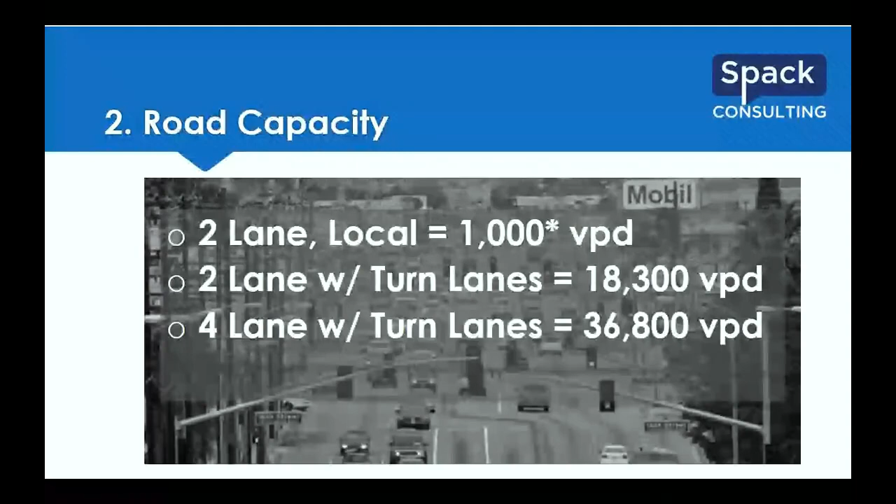Moving on to a 4-lane road with turn lanes, we're up to 36,000, roughly double the 2-lane. If you wanted to round those numbers, go to 18,000 and 36,000 - that's an easy way to remember it. You don't have to worry about it for planning purposes; this is just that ability to handle the vehicles.

For the 6-lane, you're up to 55,000 - again, roughly 18 per 2 lanes. Just think of each 2 lanes as 18,000 vehicles, so 18,000, 36, 54 gets you in the ballpark. There's the split, the commuter split, directional, and all kinds of different factors that go into those numbers, so that would be a reasonable estimate.

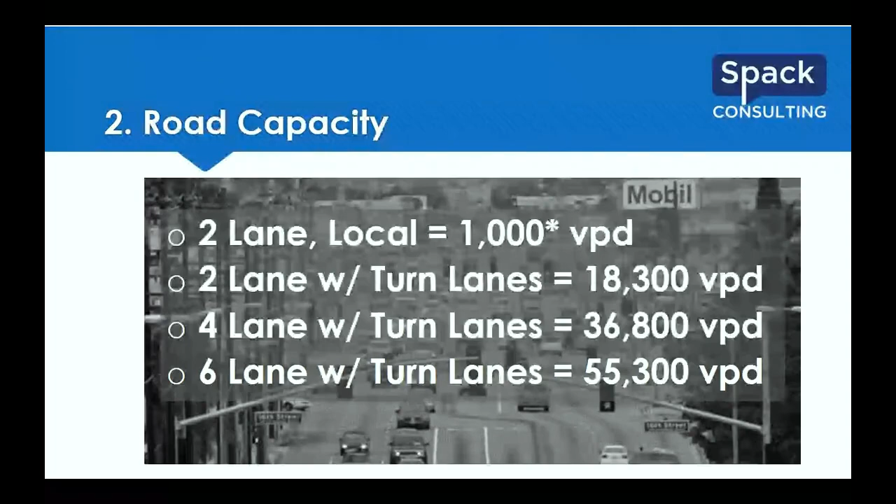More to the topic right now, are there hard medians with the turn lanes? I would say when you get to the 4 and 6 lane, there could be. With the 2 lane, it could be a 3-lane road as opposed to those definitions, so the median is one of those specific factors. You can dig into the Highway Capacity Manual and get more refined, but we're not asking you to put these numbers into your report and make any decisions on them - these are just kind of ballpark, in the range of.

Next, level of service grades. What we like to really identify is the D to E boundary. E is typically when you're at capacity, and most agencies will say that's unacceptable - they want to stay at level of service D or better. So that is the boundary that we look at.

There are 3 different types of traffic control when looking at intersections: stop signs, roundabouts, and traffic signals. The stop sign control and roundabouts use the same metric - in this case, 35 seconds of average delay for the intersection. When you go to a traffic signal, people have a greater capacity for waiting, since they know they're going to get their green, so they can sit longer - that's why we have 55 seconds for the traffic signal. This information is from the Highway Capacity Manual, 6th edition.

It hasn't changed through many editions - it's always been the same for me. But if someone is trying to relay that level of service grade to delay, or trying to make that definition back and forth, it's important to know those are the values you're looking at.

Again, these are average delays, so that's a nuance to talk to people about. That means some people get to go through at a roundabout or signal with 0 to a couple seconds delay, but people on a busy cross street waiting to get in can wait 1.5 minutes - again, it's the average. We're not going to talk about side street delay, where the Highway Capacity Manual doesn't talk about overall level of service and only does the side street. There are variations, but the important thing for all of these is just basic numbers to keep in mind.

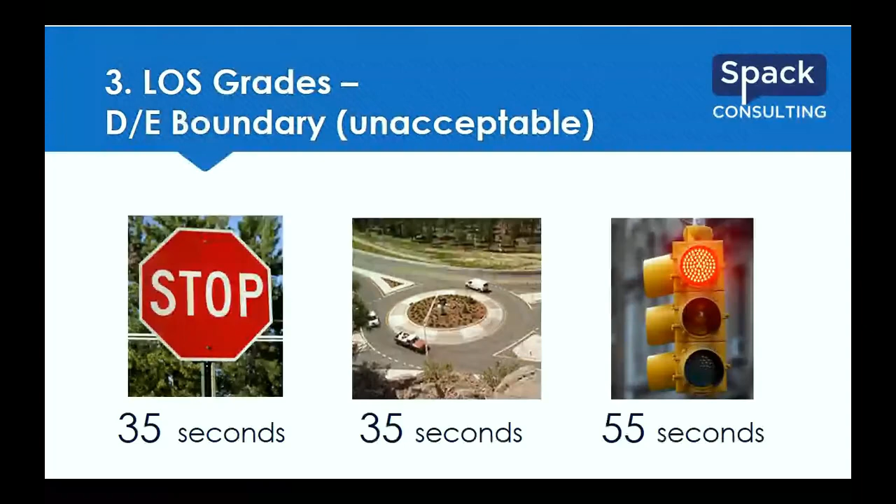All right, our next one is saturation flow rate. This is for a specific lane, basically. You have an entry lane, a single lane going into a development or anything, you can use this as the backdrop for that. So 1,900 vehicles per hour per lane.

In most studies, you're not going to have to reference this. It's not going to come up because you're looking at intersections or corridors, and it doesn't get down to that grade of detail. More importantly, where this would come up is if you're doing a QA/QC check, particularly for events, and you have an entry coming in, and you're either reviewing it or your computer is telling you that you can fit 3,000 vehicles on this single lane into this parking lot or something like that. That's where this becomes important to think back on and say, okay, we have our theoretical maximum of 1,900 per hour per lane. If we have one lane and this is telling me 3,000 vehicles per hour, how does that work? It's not possible. Just because the computer is giving us an answer doesn't mean it's right. This is one of those things to quality control check yourself, keep in the back of your mind.

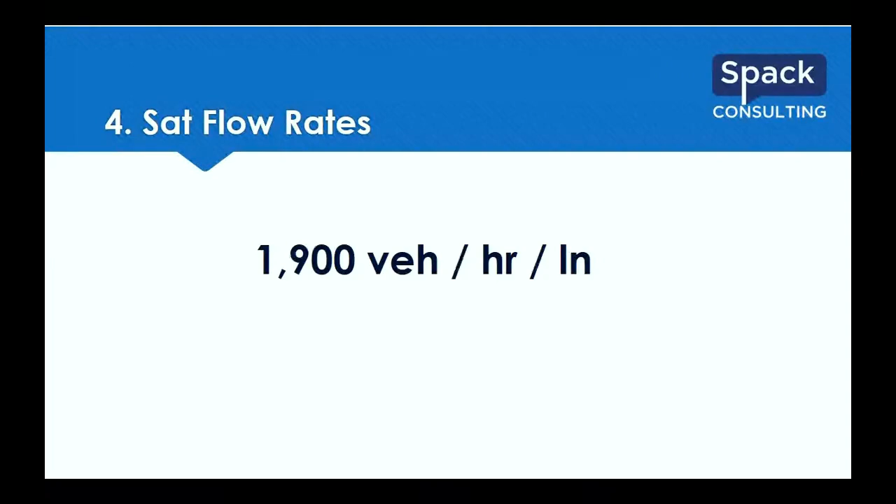So next up is a quick rule of thumb on when you need to transition from a single left turn lane to a dual left turn lane. The rule of thumb here is 300 vehicles per hour is about the break point where a single lane at a signal starts to break down and you need to look at adding a second left turn lane. We've also seen it referenced as the threshold for adding a second right turn lane, but that's a tougher rule of thumb. If you look at this aerial, there's the northbound free rights, and depending on how long the auxiliary lane is, you can get more than 300 vehicles per hour if you provide enough of its own lane. Of course, if it's a yield-controlled right merging in, that's a different scenario than having a dedicated lane for a quarter mile.

Similarly, there's a metric some people use for when you go to triple lefts, which is double the dual, so 600 vehicles per hour. I haven't seen too much research on it, so use that with a grain of salt, I'd say. But starting with your 300 for duals, double that to 600 for triples. Again, just basic guidelines for when you should expand that geometry.

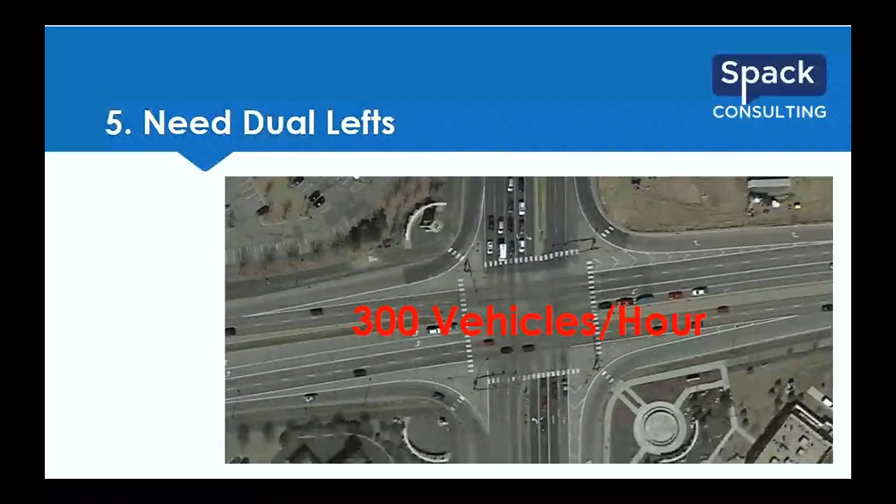This probably won't come up in a public testimony city council meeting, but it's more the numbers you want to have in the back of your mind when talking to a developer or architect about layouts, or in a meeting with the city engineer about expansion plans at an intersection. Or just looking at your analysis, again going back to what did the computer say. If you have 400 left turns and it's saying you can get through on a single lane giving you a level of service B, that might be something to double check, just to make sure there isn't a glitch in the software you're using. And that's 300 vehicles in the left turn lane specifically, not looking at through volumes here. It's just a general guideline for the number of left turn movements.

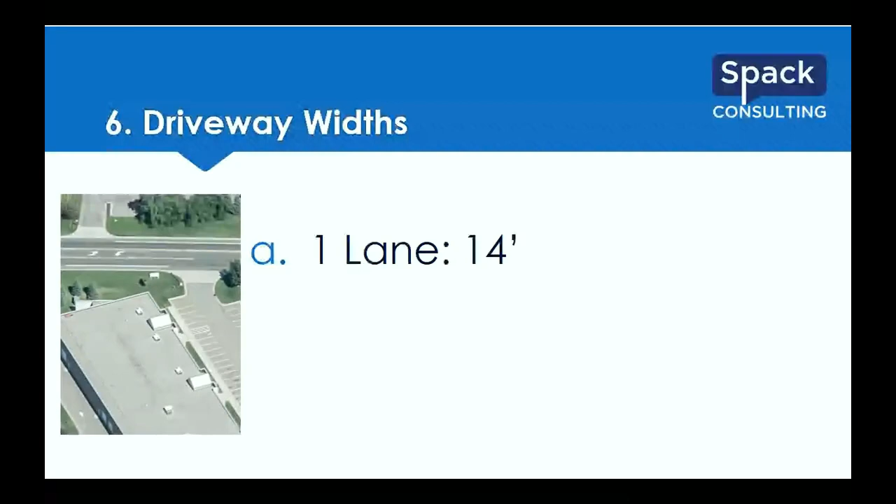The next topic, the sixth topic, is driveway widths. This is more getting back to an internal meeting. Caveat emptor that local standards and conditions vary greatly, but these are reasonable numbers we've seen in lots of different guides. For a single driveway, provide 14 feet for one lane in or out. You can go up to 24 feet if it's one lane in, one lane out. If you have two lanes out and one lane in, you go to 40 feet. In industrial areas, you need larger lane widths to accommodate industrial trucks and semi trucks, and also larger radii at the driveway.

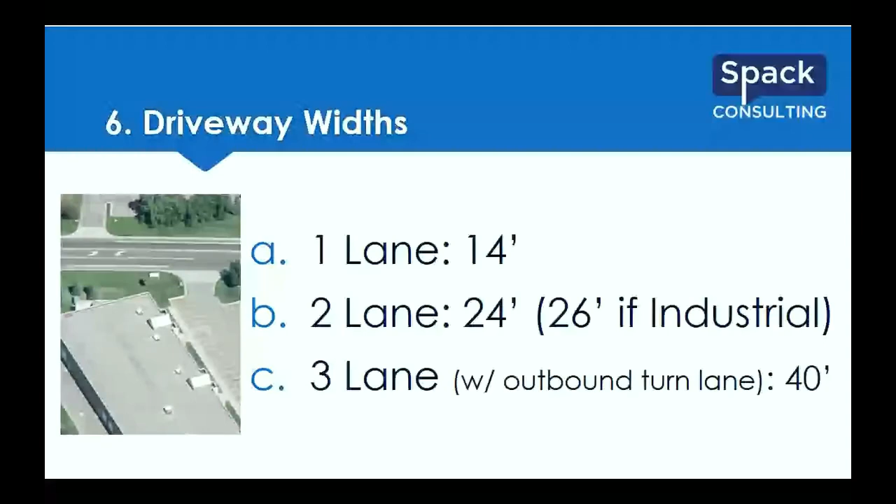That's an important thing not shown here too. If you have just a residential two-lane road development coming up to an intersection, you can get by with a 30 to 40 foot radii on the corner, and most vehicles will make that easily. If you have longer semi trucks, you'll need a 50, 60, 70 foot radius to get around the corners without jumping the curb. And then they get so big that you model them as having a right turn lane. That's a whole other topic.

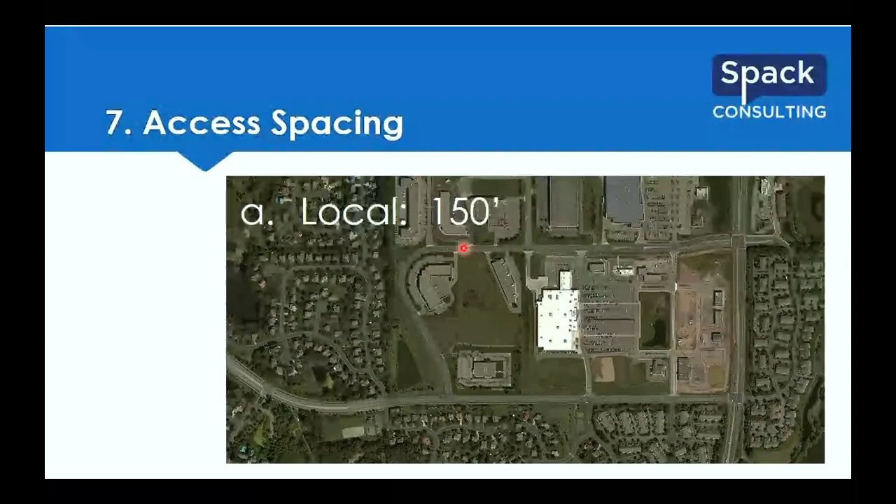Similarly, on this other side, mostly multifamily here, but they've got the connections pretty close together. And on the east-west local road, you can see for that commercial retail area, they're not worried about mobility much, they're much more concerned with access, and you can see the closeness of the driveways. So 150 feet is our guide to make sure there's some stacking room between intersections so you don't end up with safety weaving problems.

For collector roads, similar to this east-west road on the bottom of the aerial, you can see there's a bit more spacing between the driveways. We'd say 660 feet for full access ones. This gets to the distance between them for turn lanes, to make sure you've got proper stacking since you'll have higher volumes at those intersections. You can see where the pointer is, trying to make sure those intersections are squared up so you have four-legged intersections. If you go up to the local road on the north, you'll see driveways offset, which isn't as big a deal, especially if you have a two-way left turn lane.

Then we get to the arterial. This is the functional classification where you're most concerned about mobility, and access is less of a concern. The two we usually fall back on are limited access, right-in right-out at 660 feet, and full access at a quarter to a half mile. This north-south road here would be that arterial, and you can see they've got two signalized intersections with no access in between -- that's your quarter to half mile spacing there.

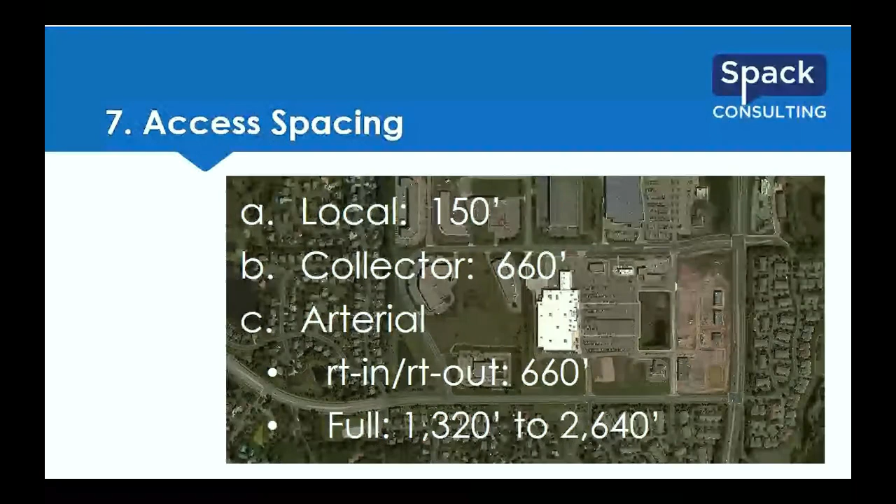So again, good spacing. For any international or metric folks on the line, this is very much based on mile spacing -- 2,640 feet is a half mile, then we get down to a quarter mile, then down to an eighth of a mile. That's how we were brought up thinking through our engineering careers, in segments of miles.

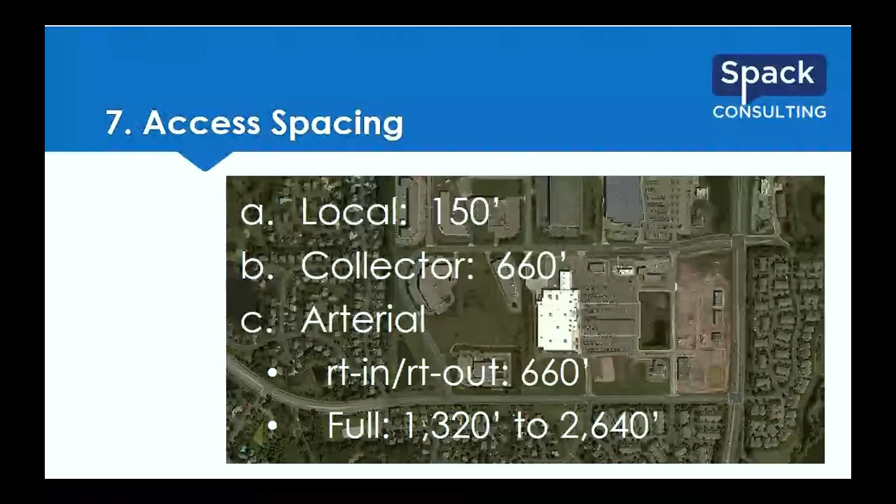The different rules of thumb: single lane roundabouts, somewhere between 120 and 160 feet diameter; dual lanes, 160 to 215 foot diameter. And then the mini roundabouts, which I've blogged about and seem to be working successfully, where you're really just dropping an island into a standard intersection, that's 50 to 80 feet diameter. So this is more of the planning and design level meetings.

If you're considering a roundabout, you can easily draw that circle over an aerial and just see what are the impacts. Do you have room if you're looking at that sort of range? Are there slopes, retaining walls, trees, utilities? Just drop that circle on an aerial so you can in 5 minutes figure out good, bad, ugly. Is it even feasible, or is a water feature too close? Something like that.

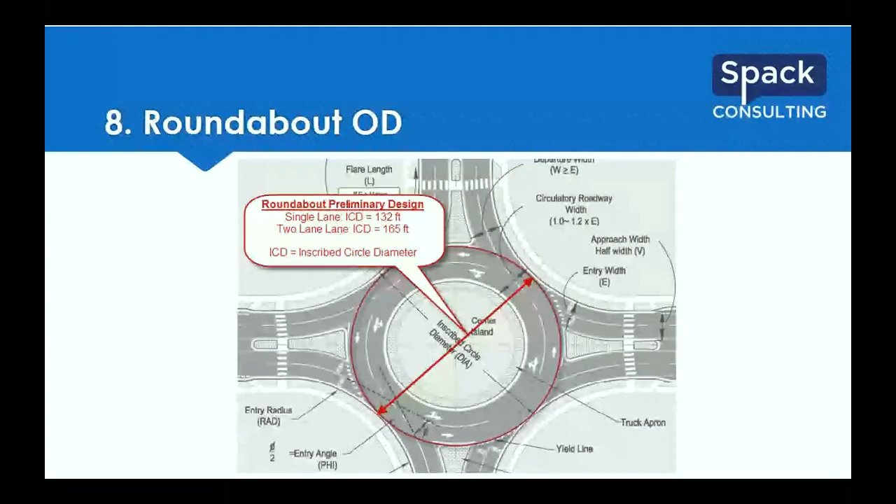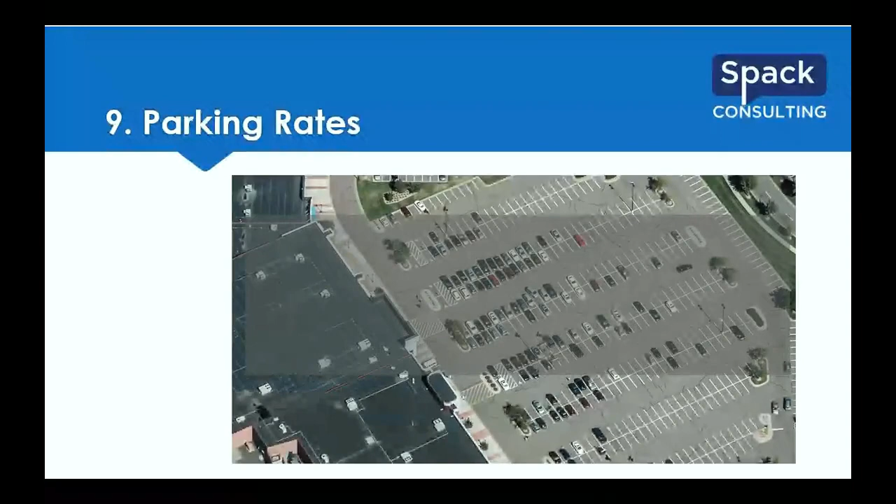All right, our next topic: parking rates. As you're looking at a development and trying to figure out what you need to provide for that parking lot, what are some general guidelines we look at? The 3 basic ones we have are multifamily, retail, and restaurant. Multifamily is 1 per bedroom, retail is 4 per 1,000 square feet, and restaurant is 15 per 1,000.

These are based on ITE Parking Generation Manual numbers and kind of just rules of thumb. This one is very subjective to location and local patterns. Of course, these are demand numbers and don't necessarily line up to zoning code requirements, so you can have those fun discussions if a city requires 6 per 1,000 square feet for retail, that kind of stuff. Or you've run into apartment buildings.

Some smaller towns have some crazy ones where they recognize the 1 per bedroom, and then they also put 1 per unit in addition to it. So if you have a 2-bedroom apartment, they need 3 parking stalls, which seems very excessive from our point of view. And a lot of very urban cities don't go by bedroom, they just go 1 per unit. So it's very much dependent on urban, suburban, small town, or big city.

The retail rate can also be very subjective, as if you have a number of different retailers, their peak parking may not line up, so the 4 per 1,000 can be excessive too. Again, it's a guideline. If there's a movie theater on the corner whose traffic peaks Friday and Saturday night versus a grocery store whose traffic peaks Saturday afternoon, they're more complementary, and overall for the site you can get away with less parking.